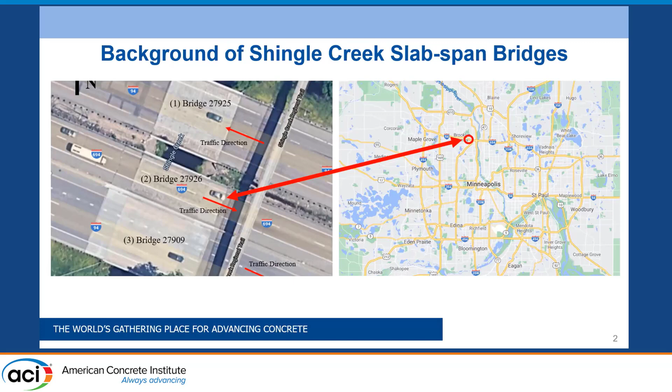And the 3 bridges are currently load restricted. So that means certain classifications of vehicles aren't allowed to cross them. So they have to take a relatively long detour to get around them. And the Department of Transportation has identified this roadway as a critical trucking corridor. So it's really important for moving heavy freight across the state of Minnesota and across the Midwest.

These bridges were constructed in the 1960s and then widened in the 1980s. So for each bridge, the end spans are 23 foot 7 inches and the mid spans are 24 foot 2 inches. And the north and south bridges have a width of 72 feet, and the middle bridge has a width of 44 feet.

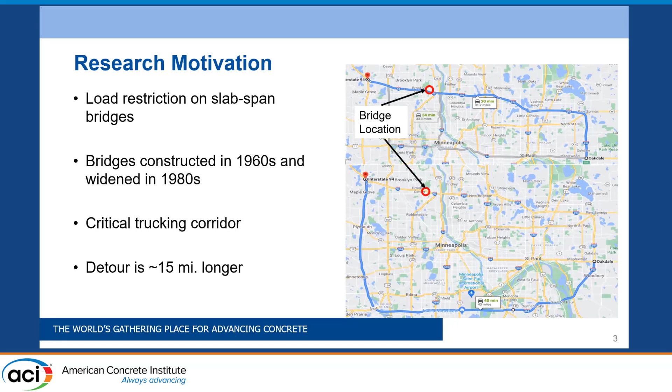The objectives of this project were to collect field data under a known load, which was a dump truck provided by the Department of Transportation filled with aggregate, develop and validate a finite element model of one of the bridges, and then evaluate that bridge's behavior and provide recommendations on the load rating, which will be given to the Department of Transportation.

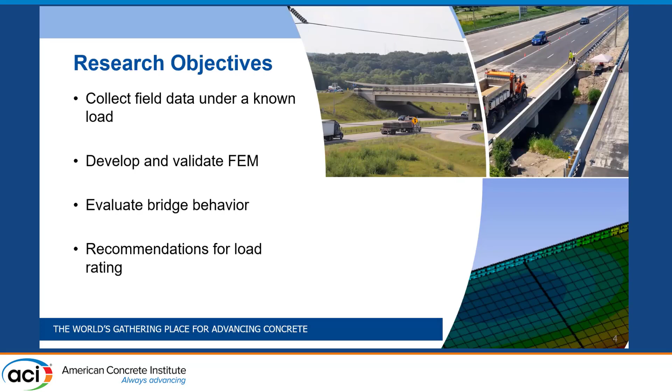So the first step of this project, the finite element model, we developed 3 initial models, one using just elastic material properties, so the modulus of elasticity of the concrete, which we measured in the field by taking concrete cores from the bridge deck, and then 2 additional models that used inelastic material properties, so Menetrey-Willam properties for uniaxial and biaxial compressive strength. In addition to that, we also modeled the steel reinforcement using isotropic multilinear hardening properties of the steel, so the yield strength, and then post-yield analysis.

And then we also simulated 2-inch by 6-inch cracks within the model, and then 24 by 6-inch cracks in the other model. This was just to play with the cross-sectional stiffness of the bridge and identify what kind of behavior we might see in the field, because these bridges were relatively severely spalled and cracked.

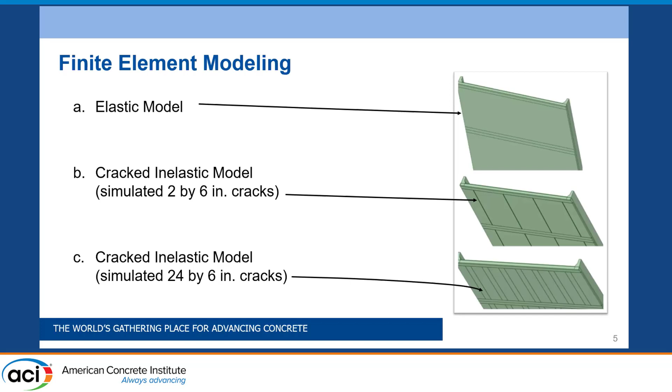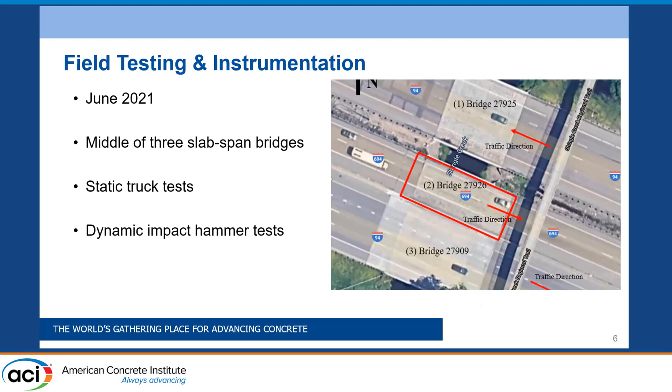So we selected the middle bridge, the narrower of the 3, to conduct field testing on in June of 2021. So we performed a set of static truck tests as well as dynamic impact hammer tests to evaluate the strain and displacement under a known load, as well as acceleration to pull out the natural frequencies and mode shapes of the structure to compare to the finite element models.

So using the initial models, we developed a set of static truck positions that we wanted to check out. We focused our testing on the northwest corner of the bridge. So we used truck positions at basically quarter points across the span of the first span, and then also positions at mid-span of each of the other 2 spans. And as I said, these were based on the initial finite element model.

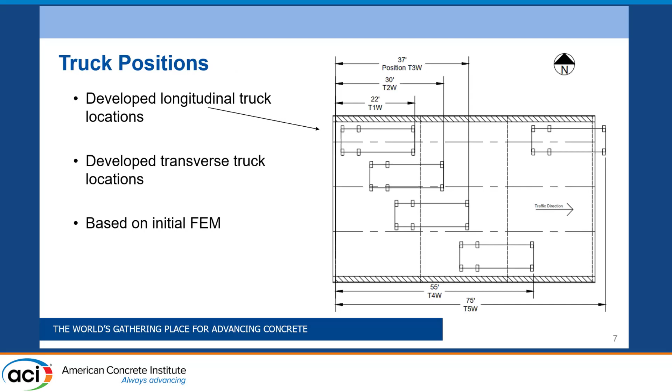And then we also tested a set of paths going across the bridge. So 1 foot from the barrier, 4.5 feet from the barrier, 8 feet from the barrier, and then 16.5 feet from the barrier, which basically put the truck right in the middle of the bridge. And then also 1 foot from the far barrier away from where we focused our testing.

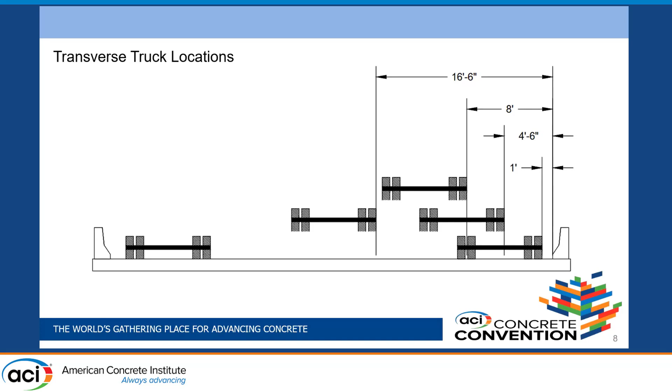We installed a big suite of instruments in the west span where we focused our testing. We did 15 strain gauges, as well as 4 linear variable differential transformers, and 6 tilt meters. And then in each of the end spans, we had 5 accelerometers and then 2 accelerometers in the mid span for the dynamic testing, and then 10 LVDTs in the east span of the bridge.

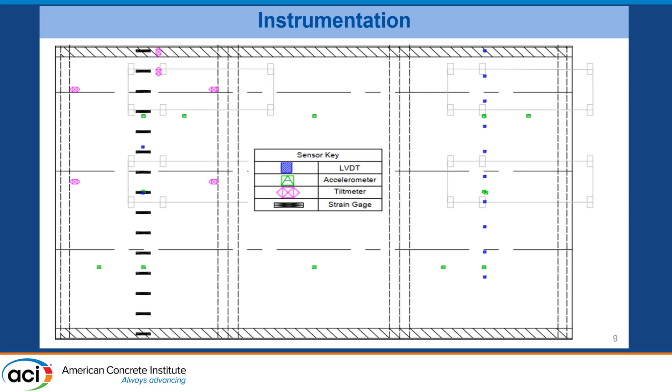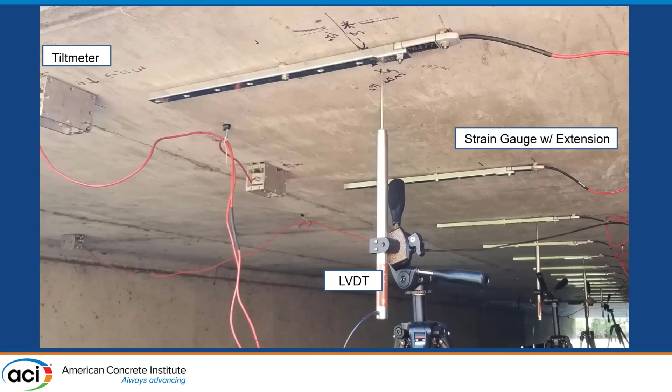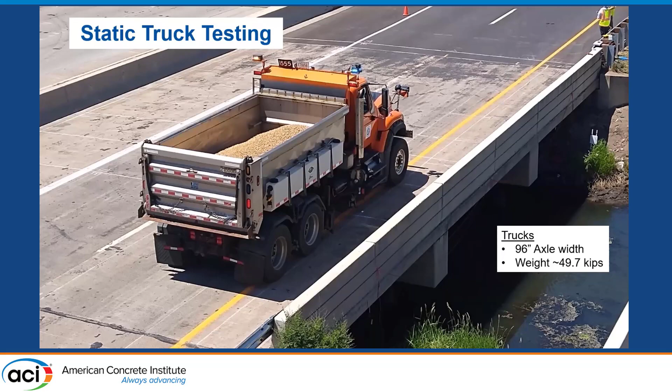So our static truck tests, we conducted a set of 53 different static truck tests based on the positions that I showed earlier. And then we also conducted single truck tests as well as back-to-back truck tests. We had 2 dump trucks. Each were loaded to about 50 kips. And we used single truck tests, back-to-back truck tests, and side-to-side truck tests to evaluate the bridge behavior.

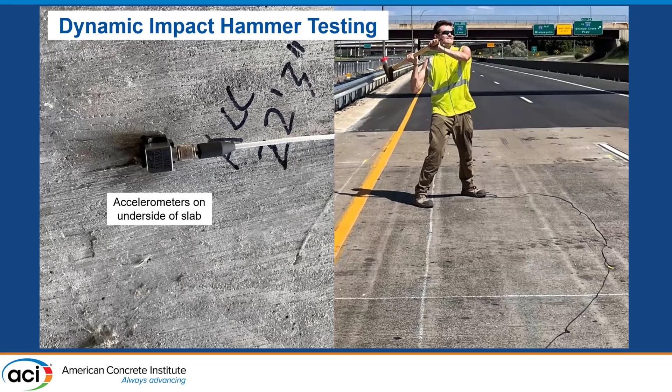And in addition to the static truck tests, as I mentioned, we conducted dynamic impact hammer testing. So over each of the 12 accelerometers that we installed on the bridge, we imparted 10 hammer strikes, ranging between 3,000 and 5,000 pounds of force on top of each of the accelerometers. So the accelerometers were installed on the underside of the deck, and we struck the bridge on the top of the deck. And this allowed us to measure the mode shapes and the frequencies after doing some analysis of the data. And we compared that to the finite element model to verify if our boundary conditions that we initially assumed for the model were correct.

We also calculated initial load distributions based on the field test for the bridge. So we used the displacement data and the strain data that we collected to determine how far across the bridge width each load was distributed, and compared this to the AASHTO models for the same value. And we found that the load distribution based on our field tests was between 40 and 80% greater than what AASHTO predicts for this bridge. So that means that the load rating could potentially be improved by that much.

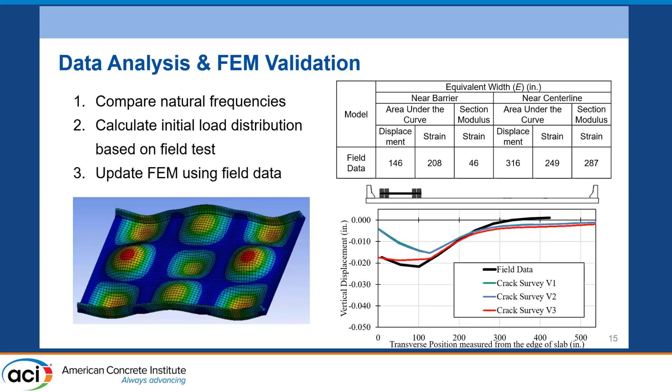So what we're going to continue to do is finalize and update the finite element model using our 3D model. And once that's complete, we'll develop a simple plate or grillage model that can essentially do the same thing. And we'll provide that to the Department of Transportation for them to use on similar bridges throughout the state.

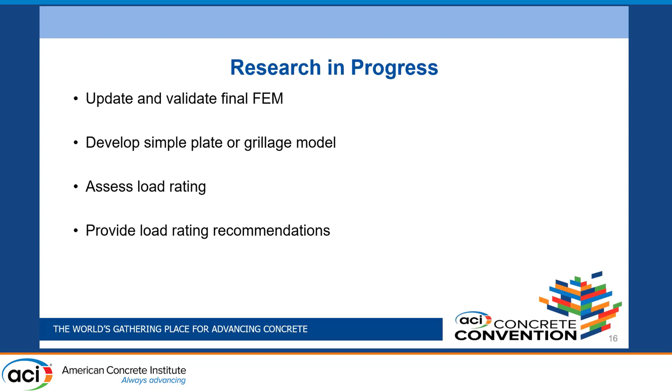And then we'll assess the load rating of the bridges, and then provide recommendations to the Department of Transportation as to whether or not they can improve the load rating or keep it the same or possibly reduce it. But as I mentioned earlier, we saw that the load distribution from our initial field tests is anywhere from 40 to 80% greater than what AASHTO predicts, which will likely lead us to suggest an improved load rating.